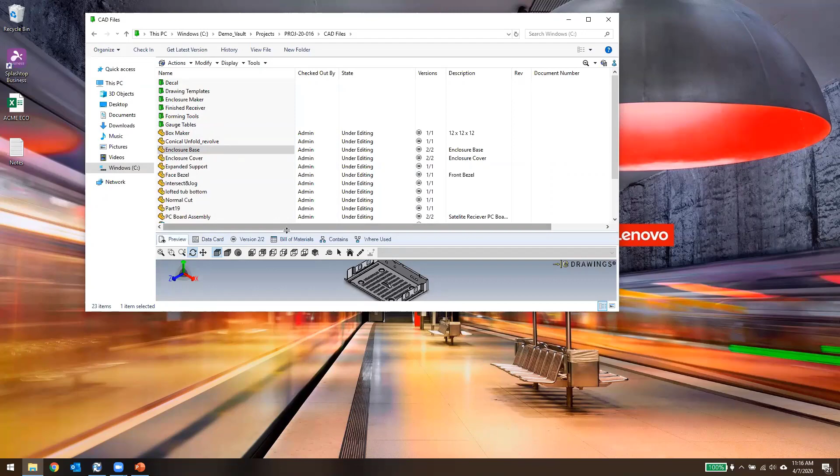Eventually down here, I'm going to be able to find a CAD file. If I dig deep enough in my vault, I'll get to gauge tables, forming tools, whatever we have related to our product data. Now, a big plus to this system - I'll maximize - again, it's just a Windows Explorer window. I can browse out to my desktop with one click.

But just like that, I can also hit the back button and be back in the vault, and I can have multiple of these open. So I don't want to beat a dead horse, but really this is just a Windows Explorer extension. They've built it in a way that makes it really easy for people to pick up because it's built inside of Windows Explorer.

So let's take a look through these tabs really quick and see what PDM is giving us. The first one is a preview, and this is a fully functional eDrawings preview. I can measure, mark up, zoom and pan - all the things you would want to do, maybe especially if you were on the shop floor.

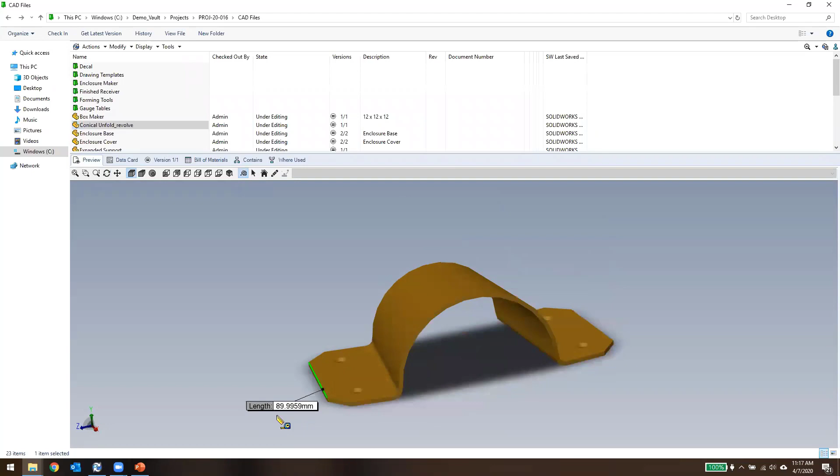If I don't have SolidWorks, but I want to be able to spin this model around and rotate it, that's pretty nice, and I can do it without downloading some kind of previewer. You can download eDrawings, obviously, but it's nice to have it built right in.

The next one is what we call the data card, and this is custom to every company. You'd have your logo here, and the values that you care about here. If you don't use drawing number, we take it off and put something else there. It's that simple. I like to call this ownership.

This is the way I've always referred to things like who the drawn by and the approved by. But really, it's totally configurable - comments, something generic like comments or costs, totally up to you. Now, material is grayed out.

You can see that I can't type anything there, even though I have this file checked out, and the reason is that's a one-way push. My users are able to select material inside of SolidWorks, and that shows out here, but I can't accidentally tinker with it because that doesn't work with that material library. Anybody who's a SolidWorks user is probably familiar with that - you can right-click on the tree inside of SolidWorks and pick a material.

Now, with that said, things like description are also connected to the file properties. So if I type in a new description and save it and check it in, I've got some buttons up top here that I'm pointing out because they're pretty useful. But back to Windows and being familiar, everything is under the right-click menu - I can also check it in from here. So if I check that in with a new description, I can rightfully expect that even the title block has been updated.

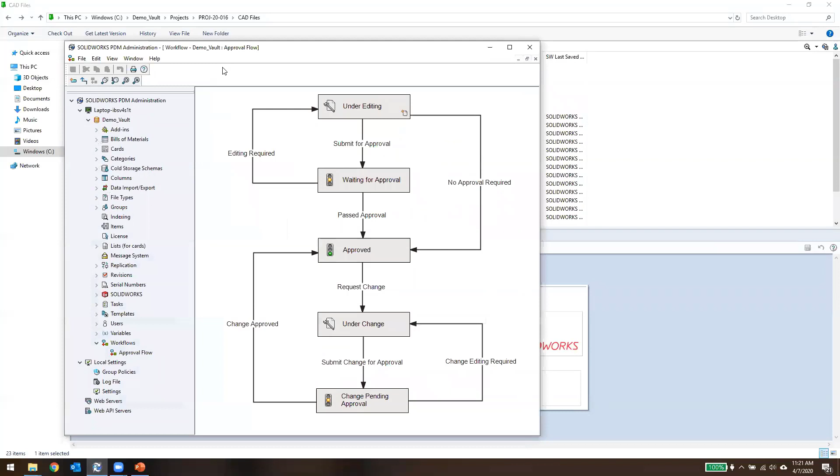So the next thing, going back to this flow chart, this is the administrative tool I've popped up now. If I wanted to add a new state, something like prototype, I can do that, and then I can add a transition, send to proto. This is not only a flow chart that looks nice, it's also the builder. So as an administrator or manager, this system isn't only easy to use, it's also easy to administer. I can save that, and now any file waiting for approval can either pass, get sent back, or send to proto.

Let's go take a look at how that appears in the system. So, change state, and now my send to proto option is there. We're going to go ahead and pass the approval because I want you to see the revision update here on the data card. And again, pointing back to some automation, part of the productivity and the why: now I don't have to open that and update the title block. That's one less thing I have to do as an engineer, so that's increasing my throughput.

I can jump to something else now. I know that the emails have been sent to whoever they're supposed to go to. My initials are put on the title block, the rev is put on the title block. So that's a little bit about the workflow.

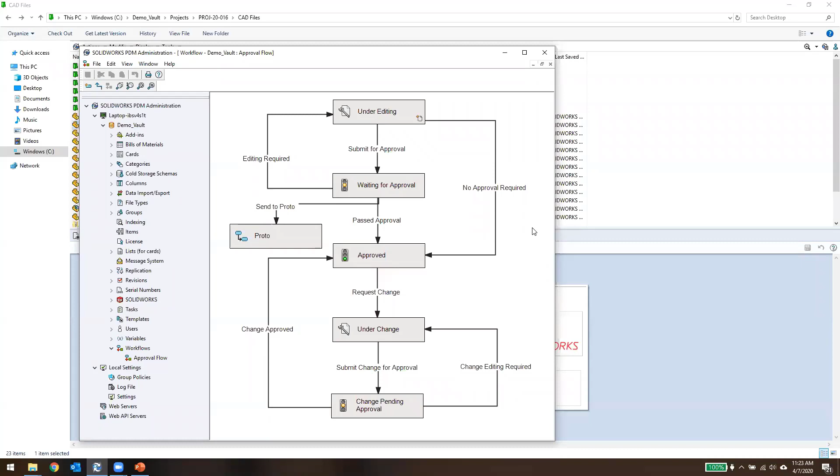So the tabs we've talked about, preview, data card, the versions, that's really showing me the same thing that's here. How many times has this file been changed? That's basically what a version is. And if I go under the history, I'll see each version has a line related to what happened, whether it was checked in, whether it transitioned through the workflow, who did it, and so on.

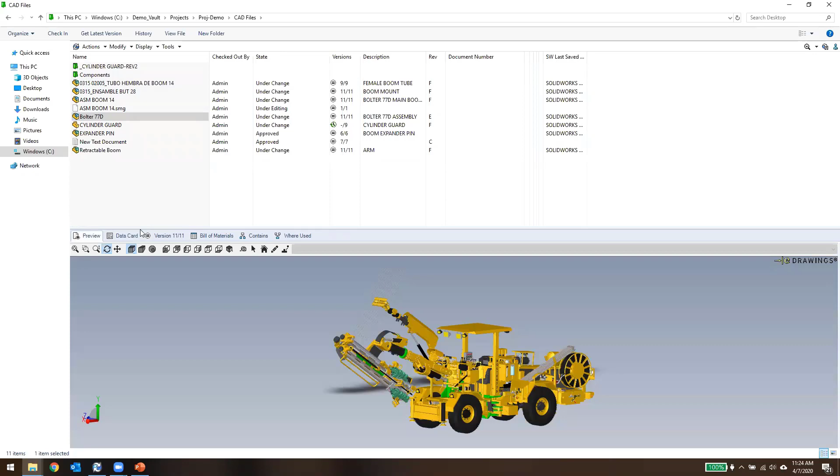The bill of materials. Now I'm going to go to a different project to show you the bill of materials because I've got a very large project, this Bolter 77D. If I show you a preview on the eDrawings, you can see this is a large construction assembly, actually used in the construction of mine shafts. So my computer's fans just started up because this is actually a very large assembly.

Now, jumping to the Bill of Materials tab, what does that mean for a BOM? Well, with the top level file selected, it's showing me the entire BOM. Now, I could switch to one of the sub-assemblies like this boom, and now I'm seeing just the BOM for that. But I can also start from the top and use this side panel to drill down.

So there's a lot of information available to me very quickly, whether or not there's a BOM on the drawing or a drawing at all. This system understands SolidWorks references, and I'll get to that as a benefit to the user on a later slide.

But really, this one is huge. If you've ever chased down a broken reference as a CAD user, you understand how frustrating that can be. If I needed to make a change to this BOM today, and maybe this is a product that's been around at our company a long time, it may not even open well in SolidWorks—errors, missing references—I've got to deal with all of that before I can make a change. As long as we're printing, selling, and producing this thing, no big deal; we let those errors fly, you open it in SolidWorks, see okay, and just close it. I'm not dealing with that today. But if you've got to make a change, it could take part of your day and really hurt productivity.

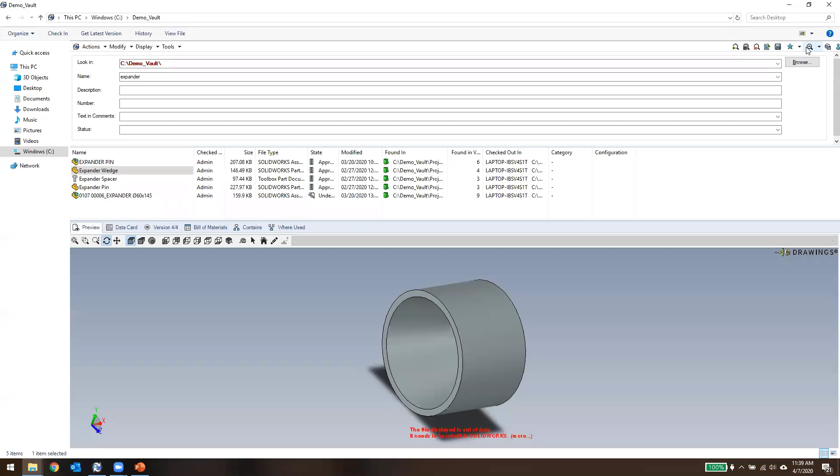So there's my search button. I'm back in a regular Windows session. Now I'm in the search tool Windows session. And I really like to highlight that this keeps your desktop clean. I don't have to have one search tool that's some different animal that I need to learn how to use. It's built right in.

Another nice thing here is to point out that these reference tabs are like breadcrumb trails. I really love the fact that you can right-click and browse to another file. So I might not know exactly where a file is, but I might know what assembly it's used in. So you can find the assembly first, then the subassembly, and then ultimately the part. And then it's just a nice little breadcrumb trail of where, oh, maybe I'll go down to another assembly here.

These are just different versions of the same assembly. But you can have one little window open for each step of the hunting process that you did. And users really end up loving that one.

Now, another feature that I want to show is the copy tree tool. So let me jump out of the search tool and find a project that's decently large in size. Don't want to rename that folder.

So, satellite receiver. This looks okay. It's not that big, but it'll work. So under the tools menu, I have something called copy tree. And this is essentially pack and go. If you're a SolidWorks user, you may know what pack and go is all about.

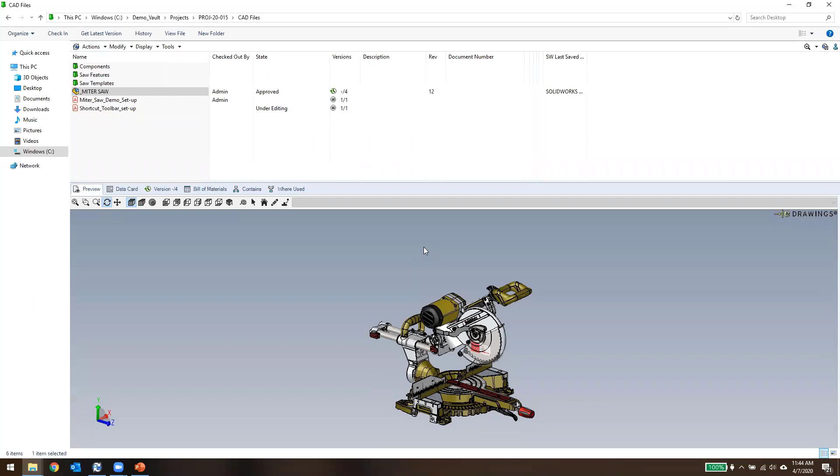Now, if I print this or open it, I am looking at version 2, or Rev A out of Rev B. And so that's just an action button. Go back and get an old copy. And I can get latest again. Of course, that would be...

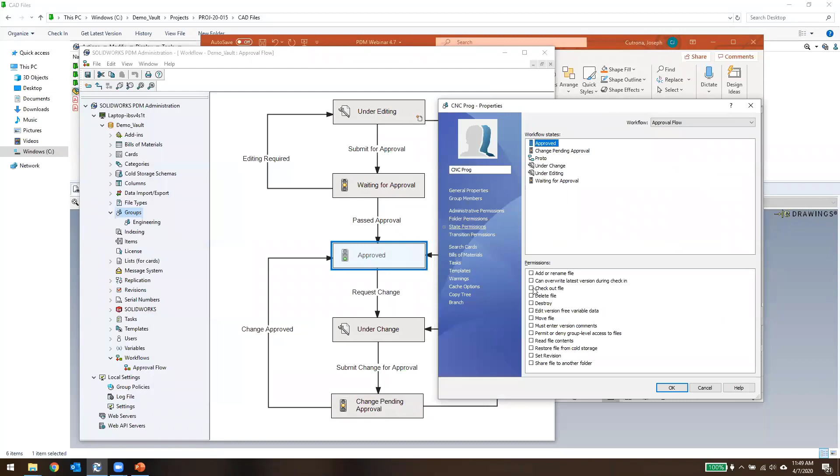So it would be very, very common to have a group like, well, of course you'd have engineering, and they're going to have their permissions, but you're also going to have groups like CNC programmers. I'm not sure if that has two M's, so I'll just leave it. And then from there, it's a matter of state permissions. And there's two ways to get to these same permissions. I showed you one. I can click on that state and choose check-in, or I can go to the group themselves. It's the same thing, just two different ways to get there.

So CNC programmer, go to the state, approved, and say, well, even after a file is released, I need these guys to check it out in order to make their CNC changes to the CAD file, to add those toolpaths to the native CAD file.

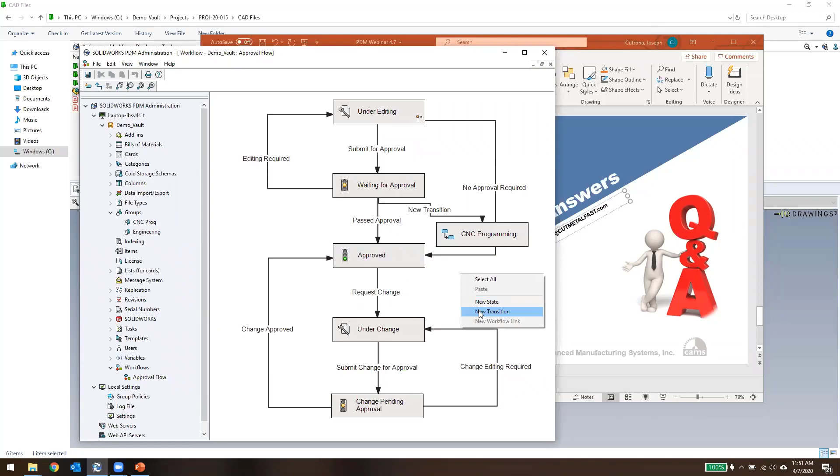Now, additionally, if I don't like that idea, if that doesn't seem very appropriate to be making changes to approved files, then it very well may be a case of adjusting our workflow so that before it gets to final approved, we have CNC programming. And so it has to go that route first in some cases. Go to there, and then from there, once the CNC guy is done, then he makes the final release. A lot of ways to set that up, a lot of ways to skin that cat.

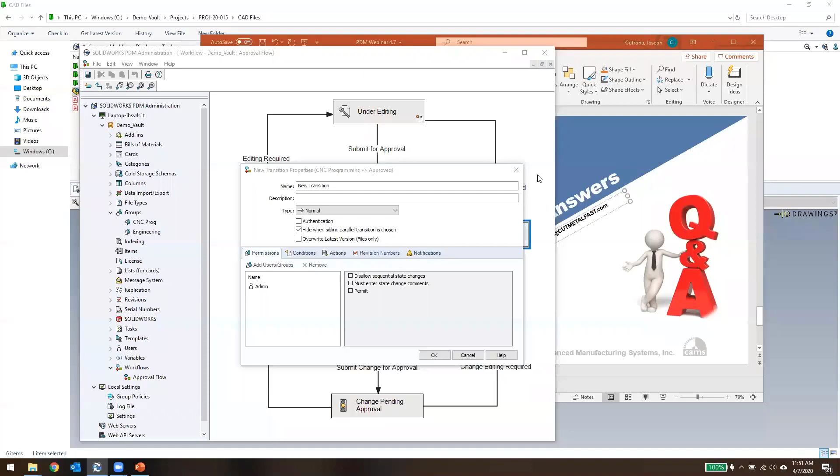Can I update my entire vault parts to 2020? There is actually a tool to do file version upgrade. This is a great question, Robert. If I browse down under, I'll just pick any one of these, and under my C drive, this is a pop quiz for me. With SolidWorks PDM, anytime you install it, you also get something called file version upgrade. Actually, it might be in the install files.

Downloads, installers. There is a program, Robert. This is a great question. And I'm a little on the spot about where to find it. But under the installation files, there is a tool that comes with PDM called File Version Upgrade. And it is essentially a batch file tool that opens and saves all of your files. It's got a few different options. For example, do you want that to be a new revision, or do you want it to save over the last revision?

I've got a good video that, well, I did that in a previous life, so I'm not sure if I can access the video on that file. But that is a great question, and we could certainly follow up. If you're looking at doing that, I'd be happy to help you walk through that file version upgrade tool. It's in the install files, and I'm not sure that I kept the SolidWorks there. No, not there.